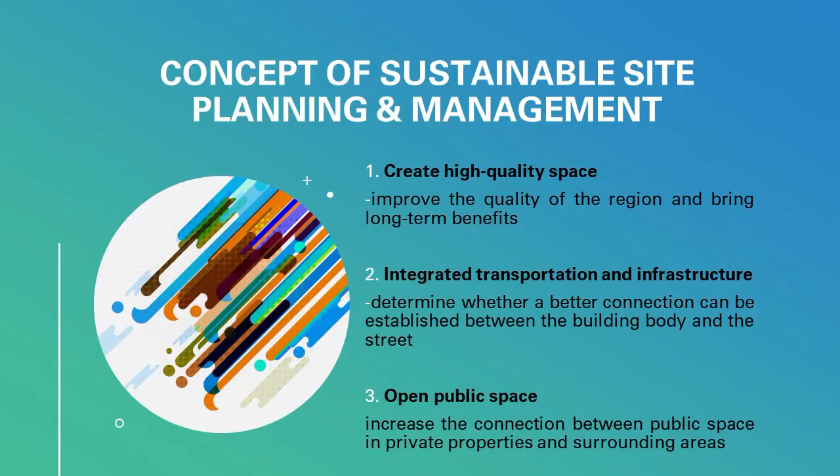The first concept is to create high quality space. In a site, a new project should be regarded as creating high quality space, which is an opportunity to improve the quality of the region and bring long-term benefit. This site planning can help large scale new projects upgrade the surrounding areas and create personality and characteristics consistent with the area. So here we pay attention to the interaction between the building and the ground, and instead create a high-quality urban space rather than a competitive project.

The second one is integrated transportation and infrastructure. These areas are used for infrastructure construction in a project site, as well as the area surrounding the road, between the building body and street. So public transportation interchanges often generate extra space, because the area is larger than actual need, resulting in underused land.

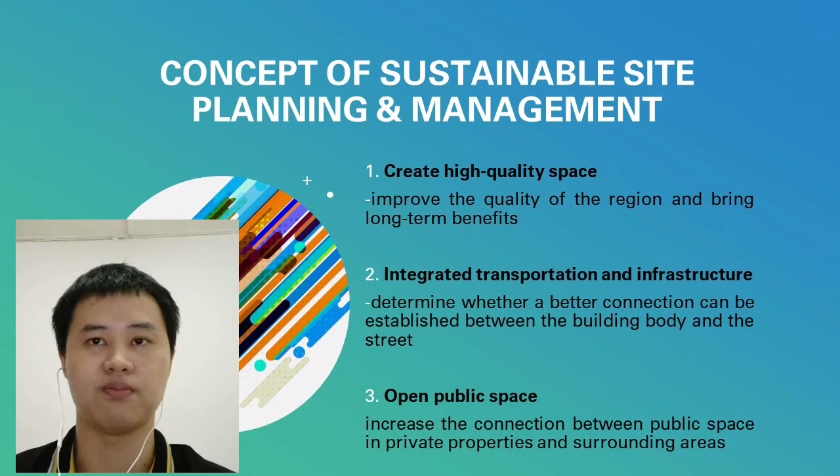The third one is open public space. The government is committed to encouraging developers to set up public space in private properties by providing additional floor areas to improve the environment. The important thing is that public and pedestrian space should be used by people to work and for society's life. This space should be clearly defined, with sidewalks, bicycle lanes, and other provisions when conditions permit.

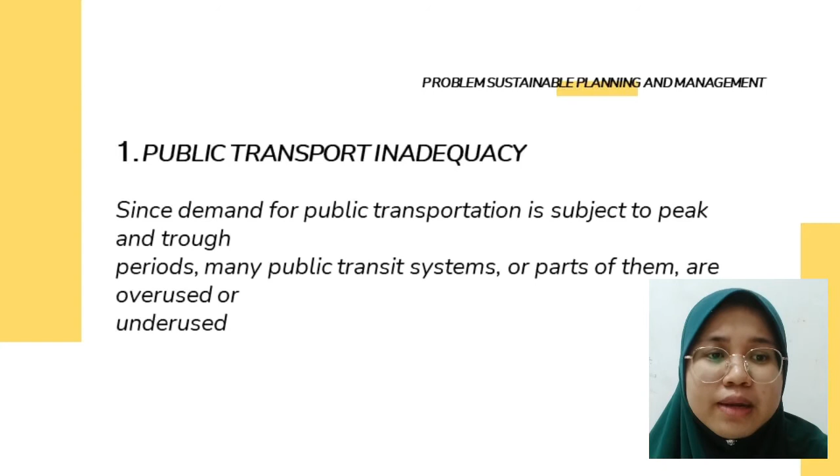The government maintains the majority of roads open to the public, which results in a loss of public space.

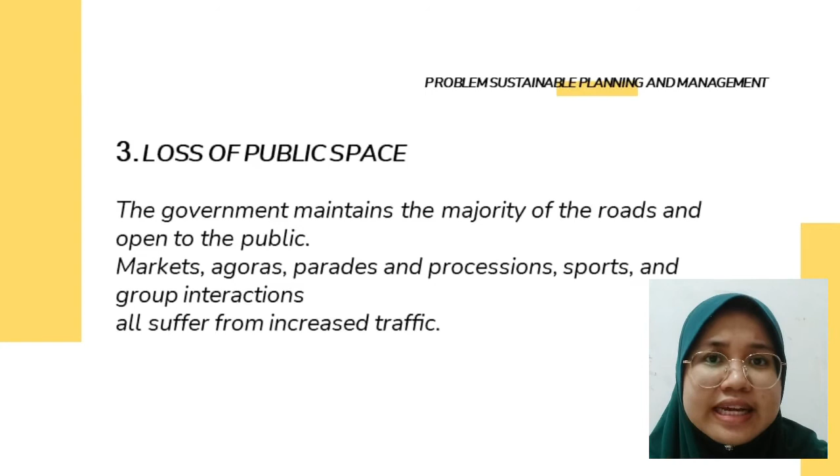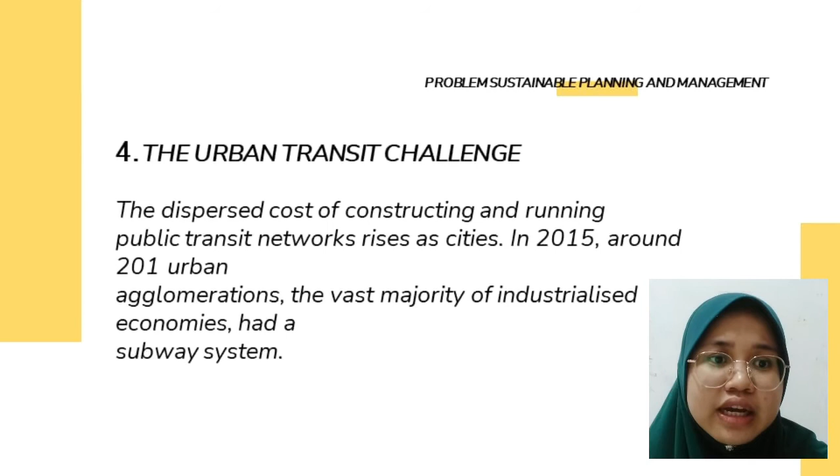So that's all for the problems of sustainable planning and management. Thank you.

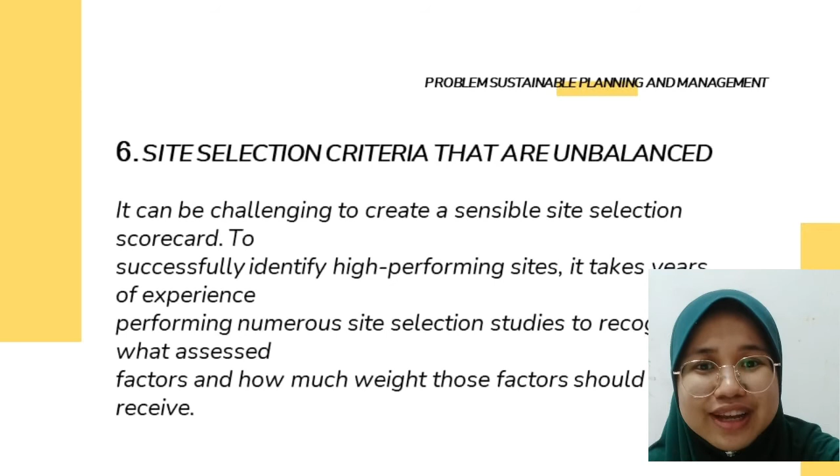The first is Malaysia's first detailed rating system for assessing the environmental design and performance of Malaysian buildings, focusing on six elements: energy efficiency, indoor environment quality, sustainable site planning and management, materials and resources, water efficiency, and innovation. So in our group assignment, we will discuss sustainable site planning and management.

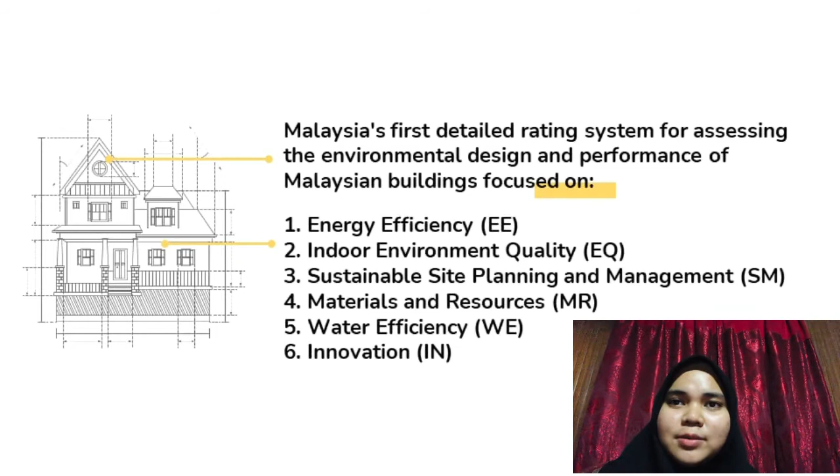For site and planning management, there are 9 factors to be considered for selecting appropriate sites, which is in our group assignment. We will focus more on site selection and planning, public transportation access, community service and connectivity, and also open spaces, landscaping, and heat island effect.

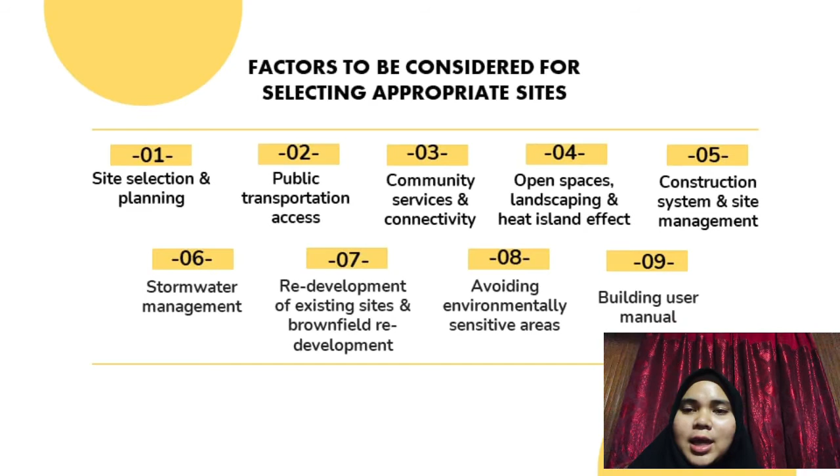There are 2 main standards that evaluate sustainable site planning and management: site planning and transportation, and the other one is site construction and management.

There are sub-requirements under the 2 standards that will be evaluated. For site planning and transportation, there are 4 sub-requirements: site selection, public transportation access, community service and connectivity, and open spaces, landscape, and heat island effects.

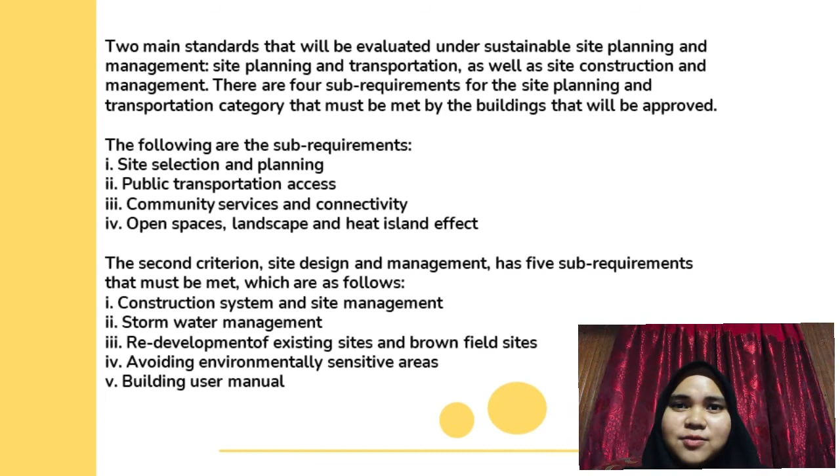The other one is site construction and management, which has 5 sub-requirements: construction system and site management, stormwater management, redevelopment of existing sites and brownfield sites, avoiding environmentally sensitive areas, and the last one is the building user manual.

For site planning and transportation, there are a few conditions that must be met by the proposed structure, which is the city's framework plan, the local plan if one exists, and also infrastructure requirements for the area. This is for the site plan exploitation.

We must encourage the selection of locations near transit hubs and the design of new housing areas to encourage the use of public transportation, and also the selection of sites near basic community facilities. This is to reduce potential heavy reliance on private transportation, which is the largest source of GHG emissions.

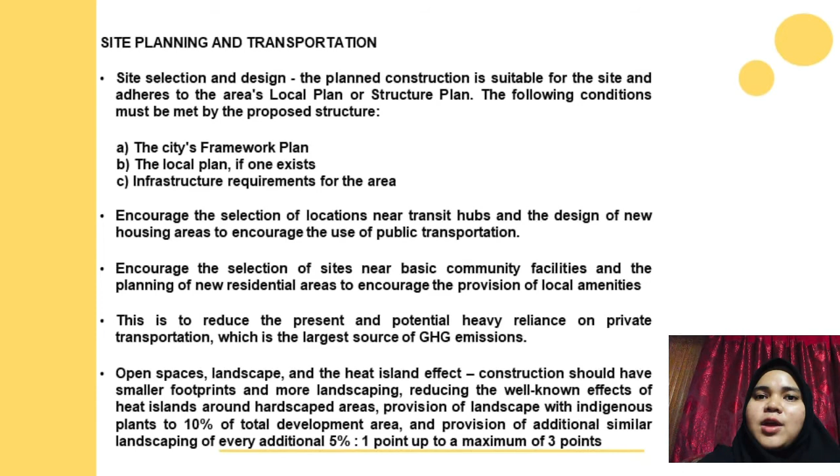In construction, buildings should have smaller footprints and more landscaping, reducing the well-known heat island effects around hardscape areas, with provision of landscape with indigenous plants covering 10% of total development area, and provision of additional landscaping for every additional 5%. The next one is site construction and management.

The first is site management and construction system, such as promoting IBS to minimize on-site construction, reducing landfill by reducing material and building waste, and also minimizing the pollution impact of housing and construction workers, controlling emissions from waste and garbage generated by construction workers to reduce pollution from these activities.

The second one is site management and construction framework, which is controlling surface water runoff from new construction, reducing contamination and stormwater runoff into river systems as a result of construction, and reducing the risk of flooding from rainwater.

The third one is brownfield redevelopment and redevelopment of existing sites, which means refraining from building in environmentally sensitive areas, encouraging existing sites to be redeveloped, redeveloping existing properties through renovation of existing structures, and brownfield site rehabilitation.

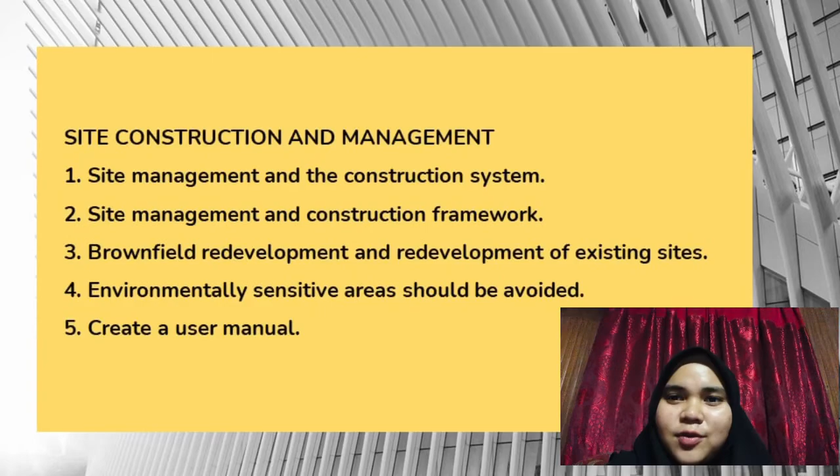In conclusion, even though this topic is one of the criteria in GBI, we also need to care about the other criteria to make sure our future buildings are qualified to be GBI buildings.

So besides this, the practice can also help us, and also the world, become a place that is more conducive for human beings to stay in, if we continue to sustain our environment.